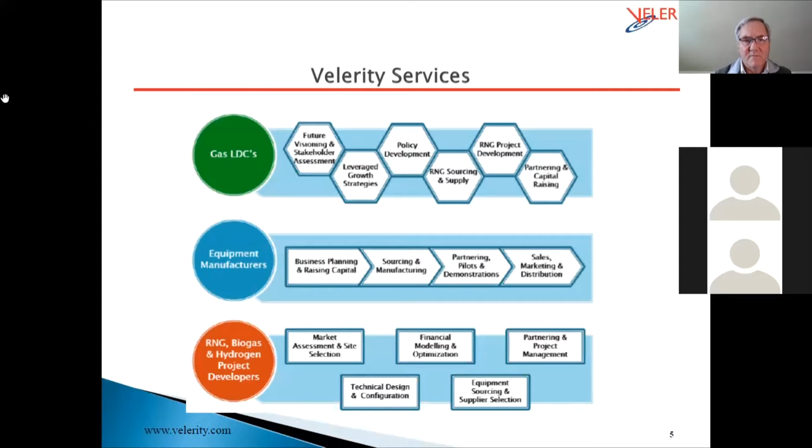Velerity provides management consulting services to companies involved in energy and technology, helping identify market opportunities, establish strategies, and implement action plans. Recent work has focused on the gas industry as well as the renewable gas market. Illustrative clients span the gamut of energy and technology companies.

So today's session, we look at the industry drivers that are causing an interest in converting pipelines to run hydrogen and to consider hydrogen as a renewable gas for heating homes and businesses and providing feedstock to industrial and petrochemical processes.

The electricity generation, the red line on this chart, has gone down significantly since about 2008, and now the attention is turning to other economic sectors in the United States. You can see the green line with transportation is now the leading emitter of carbon, and it has gone up in the last 10 years. You can also see the light purple line, industry, with a significant emissions challenge.

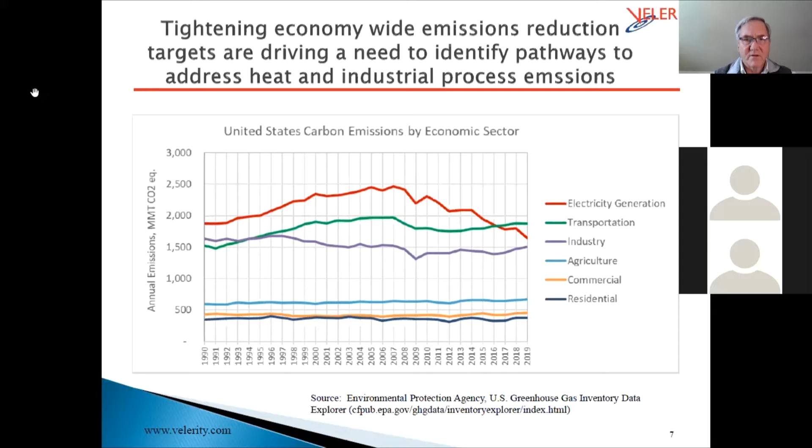So attention is shifting. 24 states have legislated carbon objectives with various dates, most of them including 2050 and intermediate years as well, and those economy-wide targets for carbon reduction are core drivers of the efforts to decarbonize our economy.

The electrify everything strategy is potentially problematic, and there are several ancillary activities associated with that. I recently heard an estimate that curtailed power could reach 25% of all power generation if we go to a full wind and solar economy. Right now it's fairly high; it's about enough electricity in California is curtailed to provide electricity to probably 500,000 homes every year. Significant curtailment, growing every year at about 50 to 60%.

The other challenge is multi-day winter heating loads may overwhelm the electricity system if we convert all fuel-based heating to electricity-based, even with higher efficiency air source and ground source heat pump systems. The storage strategy is problematic if the focus is on lithium ion only, because the cost would be very high to do multi-day storage, much less seasonal storage.

And then there are certain applications which are challenging from an electrification perspective. Older buildings, dense urban areas, and city centers may not lend themselves to the electrification pathway. And finally, we're seeing a fairly significant transition in transportation with heavy transport vehicles, and we can include in this trains, planes, trucks, and ships.

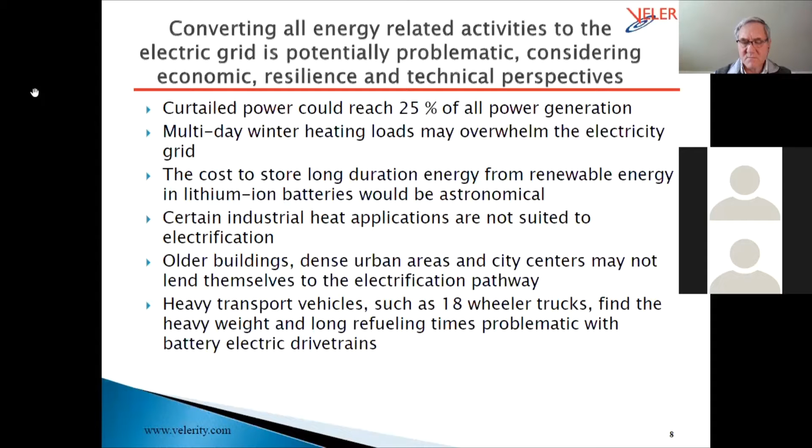To illustrate one of the challenges of an all-electrification strategy, this is a chart of the daily gas and electric use in Great Britain. You can see in the winter load the blue lines going up and down, and the red squiggly line near the bottom is the electricity demand, expressed in terawatt hours, a common unit used in Europe for describing energy flows. If we went to an all-electric system, it would have to increase peak demand by a factor of 4 or 5 times to meet the thermal load required in the middle of winter in Great Britain. This is problematic, especially if everybody comes online at once in terms of heating load.

There are ways to mitigate that, and electricity will cover a large part of that territory, but the economics will require a fuel-based solution in complementary form between the electric and gas side to achieve both system resilience and good economics.

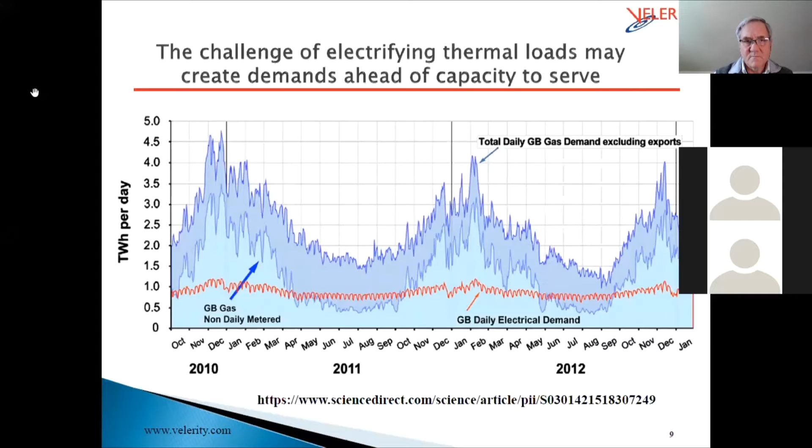The applications for hydrogen in a decarbonized society are quite varied and broad. Long duration storage is a key element, which is what we're seeing with Mitsubishi Power putting in place a relationship with Texas Brine to build salt cavern storage of hydrogen throughout the southeastern and south central United States, a long duration seasonal storage to complement the variable renewable energy that's going to be on the system.

We also see hydrogen playing a role in decarbonizing natural gas, decarbonizing the molecule, so-called. Several steel manufacturing plants are looking at direct reduction of iron with hydrogen for steel manufacturing. And as I mentioned earlier, heavy transport is moving ahead with hydrogen applications from a decarbonization perspective.

The existing hydrogen usage in industry is dominated by ammonia manufacture and petroleum refining, and we're seeing quite a bit of activity generating green hydrogen for manufacturing ammonia and decarbonizing that. People are also exploring using ammonia as a fuel in ships, as well as ammonia as a carrier for hydrogen - converting hydrogen to ammonia, shipping it around the world in large tankers, then either using that ammonia for power generation directly into a gas turbine, or converting it back into hydrogen for use in a refueling strategy.

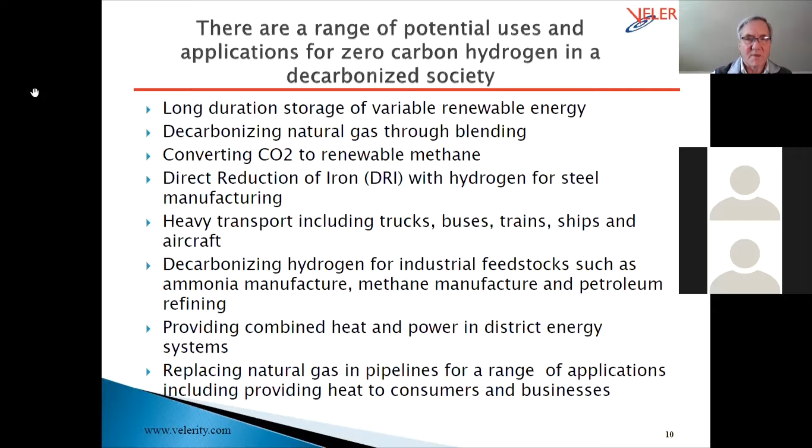And then finally, integrating hydrogen into natural gas pipelines, as well as generating synthetic methane with biogenic sources of carbon dioxide, further reducing greenhouse gas emissions and injecting that resulting synthetic methane into natural gas pipelines.

The United Kingdom has moved ahead in trying to understand the decarbonization of their economy, doing quite a bit of work to understand the implications and requirements associated with this significant decarbonization. They've identified a net zero target by 2050 and a 78% reduction by 2035, halfway between now and 2050.

85% of the homes, roughly 20 million homes in the UK, are heated with natural gas. The real question is that natural gas is responsible for a quarter of the emissions in Great Britain, and so it becomes a key target for emissions reduction. The key question is, how do you do it?

They've already announced that new homes will not be able to have gas and oil furnaces after 2025. Currently, there are 1.7 million oil and gas furnaces installed every year. It's an interesting transition, and the government has an ambition to reach 600,000 heat pump installs for residential heat every year going forward.

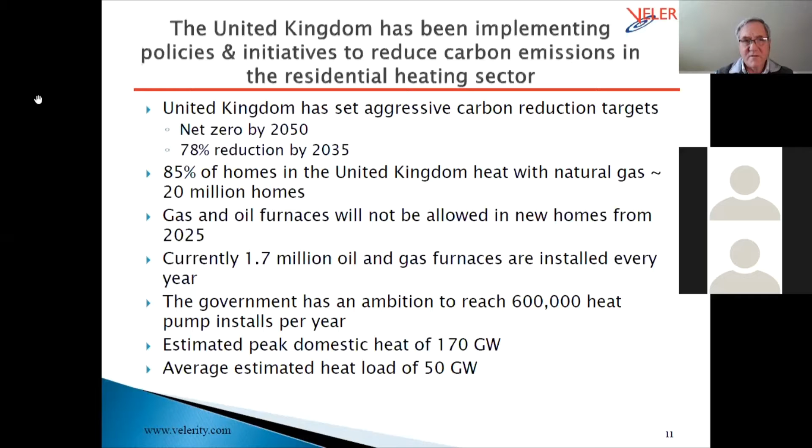You can see the estimated peak domestic heat of 170 gigawatts and the average estimated heat load of 50 gigawatts. So this is the ambition in the United Kingdom, and they haven't answered all the questions yet, but they've been making an effort to understand the situation.

They've conducted a number of studies, paper studies indeed, but they also are integrated with extensive modeling of different pathways to understand what the great energy transformation means for getting to net zero by 2050. I'll quickly review three papers of import in the UK.

One is Clean Growth Transforming Heating. The first set of recommendations is to consider expanding investment in heat networks, district energy systems going forward, making sure the government not only provides incentives but expands the existing set of incentives to expand heat networks in the UK.

They also want to make sure—this is one of the issues in all of these studies—that they deal with the complexity of all of these heat sources and stakeholders.

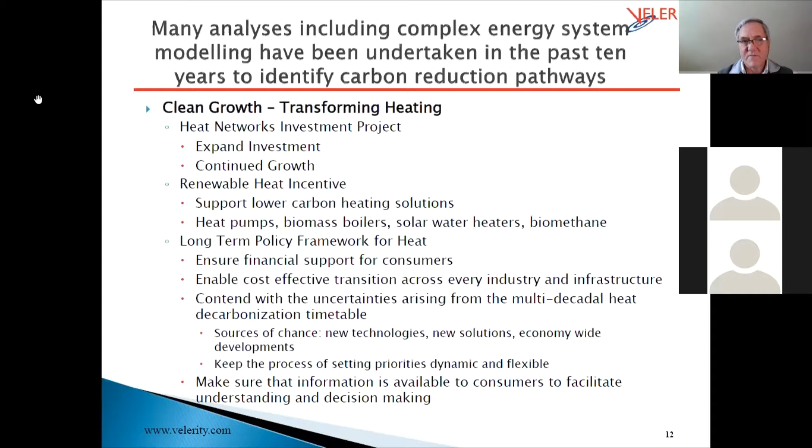The final point is key, of course, which is make sure all the stakeholders have the information they need to make good and effective decisions going forward.

Two other reports: analysis of alternative UK heat decarbonization pathways, and next steps for UK heat policy. These compare the whole system costs of alternative scenarios and understand the implications of those scenarios and pathways on the gas and electric networks. This is a very complex question to answer—the interplay between going all electric or moving towards renewable gas or some mixture of the two.

There even are hybrid boilers out there. In the UK we call them boilers, in the US we call them furnaces. So there are actually boilers going in that are combos, both gas and electric, and they can also be combo hydrogen and electric as well. Being able to build some of that uncertainty into the capability of the end use appliances is clearly part of the strategy of the contractors and equipment suppliers.

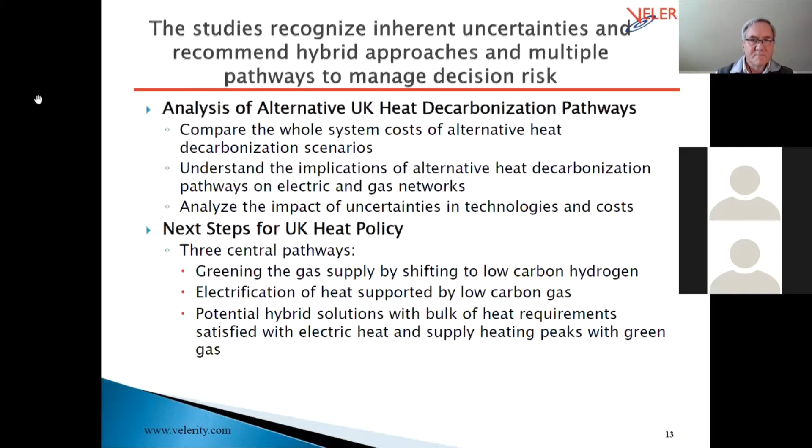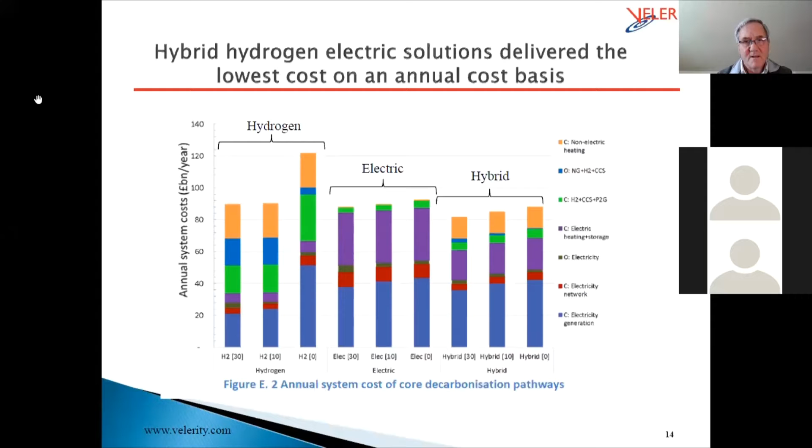I have the results of two studies that have been done, and these are very large studies that have a lot to them, so they can't possibly be represented in a single chart. This shows the running of multiple models with several different hydrogen strategies, several different electric strategies, and then hybrid, meaning both hydrogen and electric studies. At the end of the day, the lowest cost strategy was the hybrid set. This begins to speak to potentially not riding the hydrogen horse entirely or riding the electric horse entirely, but a hybrid, which provides a balance—but you can also shift gears if needed to emphasize certain strategies over others as new capabilities and learnings emerge. It also speaks to a certain amount of uncertainty in these models, or the results that can be interpreted.

If we look at these charts, what they are looking at is the total cost over, say, 20 years of each of these scenarios, normalized to an annualized cost. It's almost like a levelized cost of energy type basis to enable comparability.

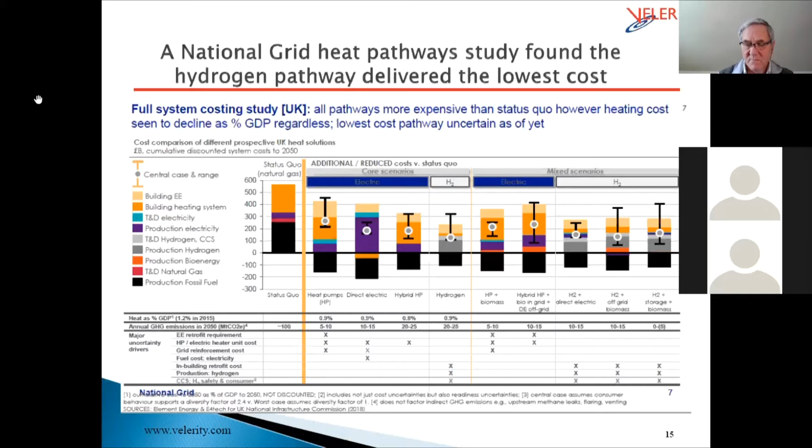It is important for everyone in the hydrogen industry to recognize that if decarbonization is a critical move, we can start fresh by developing green hydrogen and blue hydrogen resources that are low to zero carbon. But it's also important to recognize that we currently produce about 115 million tons a year of hydrogen right now, the bulk of which is gray hydrogen.

We can certainly see some of the petroleum and petrochemical industry players moving to carbon capture and sequestration in order to address the incremental cost of reducing the carbon emissions of existing systems. We can also see that the bulk of hydrogen goes to refining and ammonia, with methanol production as another application, and there's a range of other uses for hydrogen as well.

Most of this is in fence production and use—in other words, a steam methane plant that would be located or co-located with a petrochemical facility.

There are also pipelines—about 1,600 miles of pipeline in the United States today. Those pipelines are designed to transit hydrogen to the various points where its use is demanded, for both ammonia manufacturing and refining. Our most significant pipeline is in the Louisiana, Texas Gulf Coast area, and it has multiple sources of hydrogen onto the pipeline and multiple uses off of that pipeline. It's a very cost-effective way to move hydrogen around.

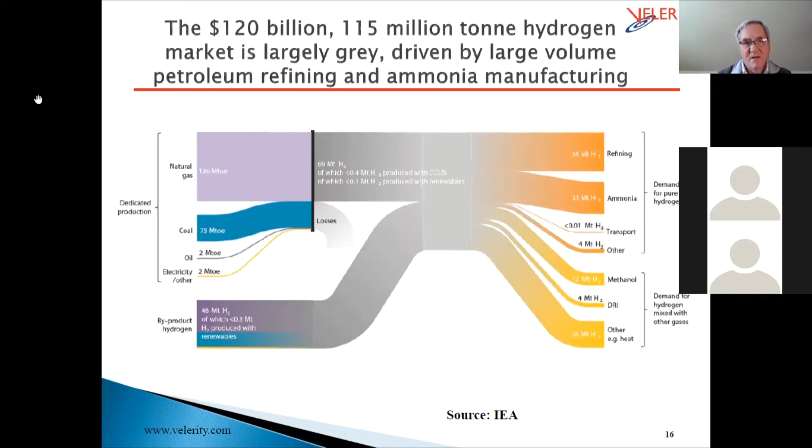Now, this is a chart which is quite detailed, so I welcome you taking a closer look after this presentation. But let me just explain what's on the left and what's on the right, and I can color code it for you.

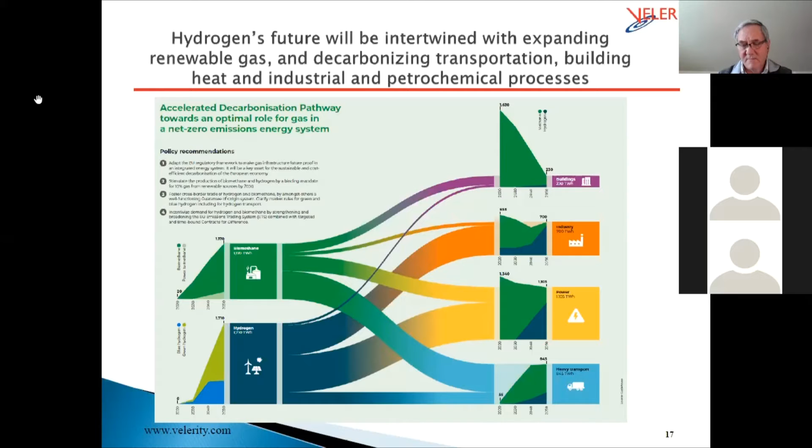The economics of hydrogen are challenging, depending on how much you need, what form it takes, and how you produce it. That's why we can see in the green hydrogen industry there's been a huge effort over a number of years for companies to establish the means by which they will get their hands on green hydrogen and get that hydrogen to the place where it's needed, in the quality and quantity that's required. It's a very challenging problem.

If we look at Nikola and their fueling strategy, which we reviewed two weeks ago, we can see they've been making an effort to establish that strategy for 3 or 4 years, and they only recently arrived at a strategy which includes Arizona Public Service providing 3.7 cents electricity that turns into $1.20 per kilogram hydrogen, and then liquefying that.

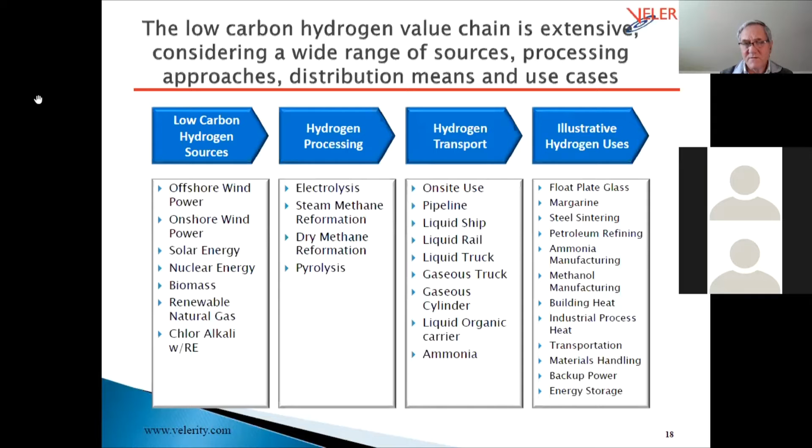In the heating realm, the strategies emerging, mostly in Europe, around decarbonization of building heat certainly, as Amory Lovins would emphasize, require that you make all applications more efficient if you can. So you begin with building efficiency, appliance efficiency, energy management.

And this is part and parcel of the strategies being deployed in the UK, from which this information is based. We can also see that efforts are being made to reduce the carbon intensity of the supply of heat energy.

Biomethane is one, power to methane, hydrogen blending, 100% hydrogen, and then the heat networks. Certainly with a higher proportion of denser city centers in Europe and existing district energy systems, there's great interest in having the heat networks

scavenge any sources of heat in their systems, as well as putting in geothermal heat pumps and air source heat pumps on those networks. But then, of course, integrating the potential for using biomethane and hydrogen in the renewable gas systems in order to provide heat to those heat networks.

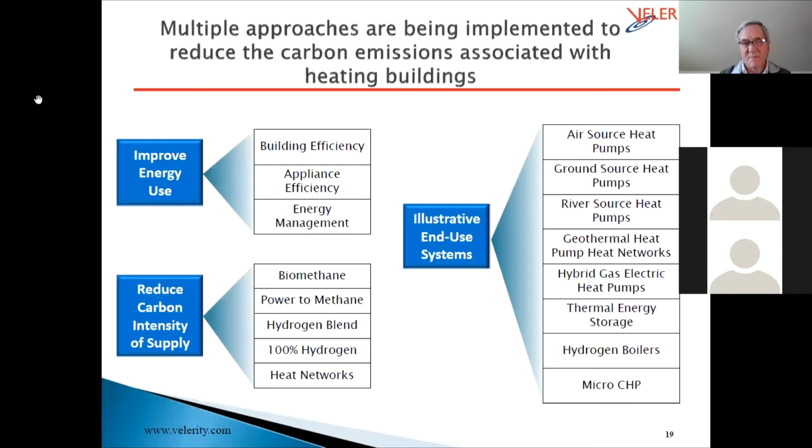So one system I want to speak to is a proposed 25,000-mile hydrogen pipeline network in 21 European countries. This is just an astounding vision. What is key here is they're really talking about repurposing existing natural gas pipelines for about two-thirds of this 25,000-mile network.

And then adding new pipeline extensions into key market areas, industrial zones, etc., for hydrogen, certainly envisioning that hydrogen is going to be fed across the European economy most efficiently through pipelines, as opposed to using liquid trucks or whatever other methods. Gaseous or liquid are the only other two means by which to transport it.

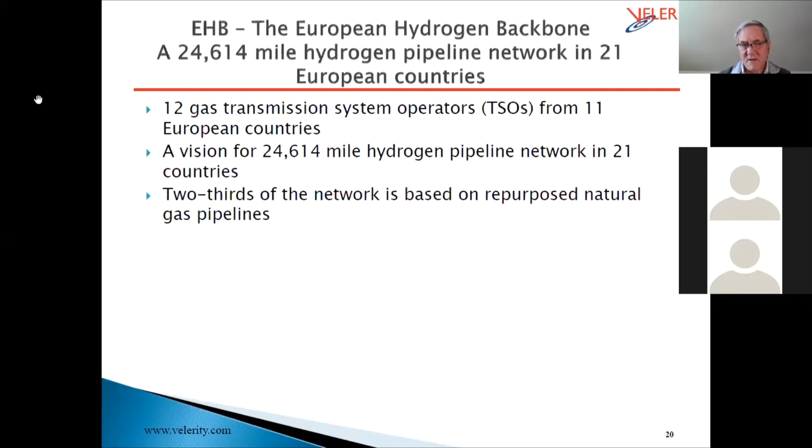And what's also interesting is that this was actually built upon individual company collaborations that identified specific areas for hydrogen pipeline development, mostly in terms of connecting wind-sourced hydrogen into industrial zones, and then looking at industrial zones from a regional perspective, building on those initial plans, as you can see.

One other point I want to make sure we touch on, which is a key part of this strategy: the role of hydrogen in modulating and mitigating the variability of wind and solar is really key, and that's a major driver of these systems. This includes storage of hydrogen to provide month-to-month and seasonal storage in order to mitigate the ups and downs of energy flows associated with variable renewable energy.

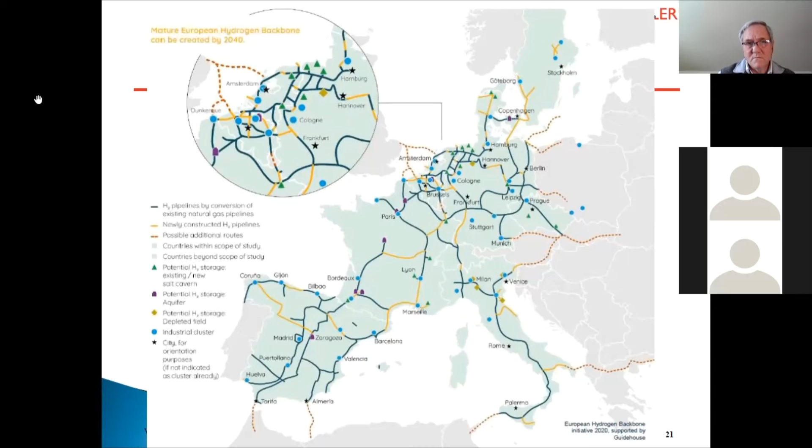The other project I want to mention is notable for its phased approach, representing some fairly good thinking on the part of the partners, Gasunie, TenneT, and Thyssengas. They're envisioning a 100-megawatt power-to-gas facility in an industrial zone in Lower Saxony, located to take advantage of landing sites for electric trunks associated with North Sea wind plants, as well as access to gas infrastructure.

It's envisioned that by 2035, 23 gigawatts of wind will be commissioned in the North Sea area, landing near this location. That 23 gigawatts of wind is going to create an oversupply of electricity, creating the opportunity to convert it to hydrogen cost effectively.

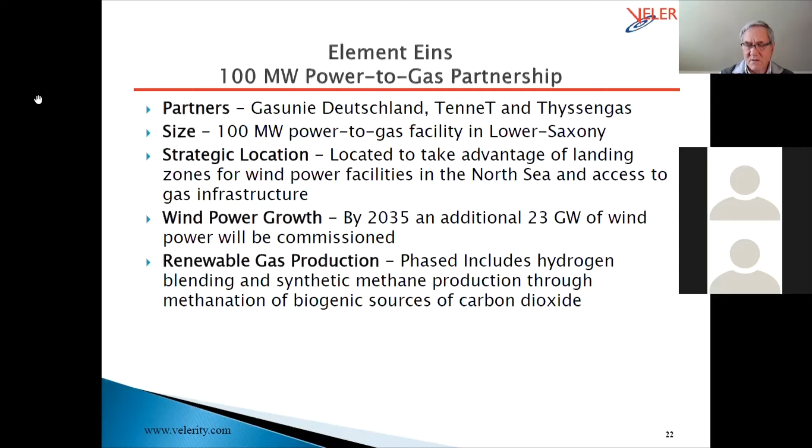They're also envisioning different stages. The phases, as explained here, begin by blending hydrogen into existing natural gas pipelines, up to 20% by volume, meaning 80% by volume natural gas and 20% by volume hydrogen. Just a reminder that hydrogen at 20% of the volume in a pipeline only represents 7% of the energy—it's not that dense at the same pressure from an energy perspective.

And they will also be using that hydrogen for refueling centers for trucks. So that's phase 1 and phase 2.

The next phase is to generate renewable methane and green hydrogen combined with CO2 for methanation—sort of a double whammy here: find biogenic sources of methane from landfills, wastewater treatment plants, agricultural waste, but also upgrade the errant CO2 and create additional methane, injecting that green methane into the natural gas pipelines.

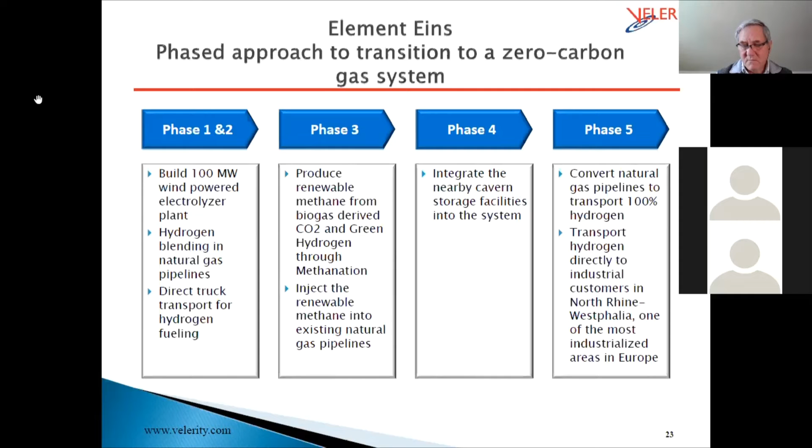I want to pay attention to the clock here, but we have this case study and then another one, and then we'll open for questions and answers.

I did want to point out this project for the Macedonian region, the northwest part of Greece. It's a $10 billion program to convert the existing 4 major coal power plants that provide 20% of the capacity in the Greek electricity system into hydrogen.

It's a multi-pronged approach integrating fuel cells and storage, also integrating with an existing district energy heat system for 120,000 people in Greece that they'd be converting. They also would be exporting hydrogen and building a 120-kilometer pipeline to do that, the Trans-Adriatic pipeline, transmitting hydrogen to Italy. So this begins to look at some of the business case opportunities with hydrogen generation.

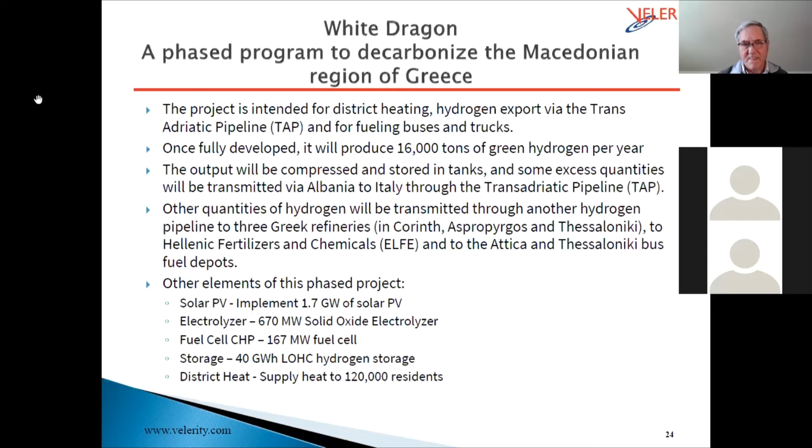The final case study for today is shifting over to the residential side, hydrogen to the home. There are a few test cases and experimentations going on. I wanted to point to this one. The funding has been provided, and they are moving forward with this program. It's kind of brilliant in terms of what they're doing.

First, the strategy is to provide hydrogen heat to 300 homes in Levenmouth on the east coast of Scotland. They'll be providing these homes with free boilers, heaters, and cooking appliances. The participants in this program will pay the same rate for the hydrogen heat as they will for natural gas today.

The approach for the infrastructure is to lay new pipes for the hydrogen alongside 1,000 properties. So they're clearly expecting 1/3 of the people to participate, but it's not a requirement. Consumers will have the choice of staying with natural gas or switching to green hydrogen.

The funding, you can see, is 25 million from Ofgem, a funding resource in the UK. The Scottish government has put in 10 million, and then there's additional funding from the primary host, SGN, as well as 3 other British gas distribution networks. You can see it's wind power to electrolysis. It integrates hydrogen storage, and then zero carbon heating for the homes.

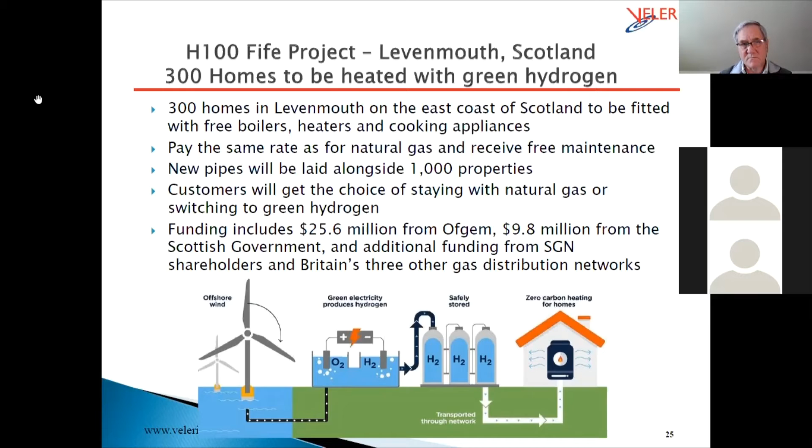The illustration here shows from left to right how the hydrogen flows, and at the very last shows what the impacts are on carbon.

The wind turbine already exists. It's a 7 megawatt turbine offshore, estimated to produce 21,000 megawatt hours per year.

I've just shown an image of an electrolyzer. I'm not trying to pitch or promote any specific company. But if you match the electrolyzer to the wind turbine and run the numbers, it would produce 429,000 kilograms of hydrogen per year based on current system capabilities.

The homes, based on the heat load in the UK, the average heat load per home would require 360 kilograms of hydrogen per year for heating each home.

That's an actual home in Levenmouth with the turbine sort of hidden behind the house, interestingly enough. The hydrogen requirement, therefore, with the 300 homes would be 108,000 kilograms a year.

So what this shows, first of all, is that the turbine they already have provides more hydrogen than the 300 homes will require, by almost a factor of 4. So plenty of hydrogen production.

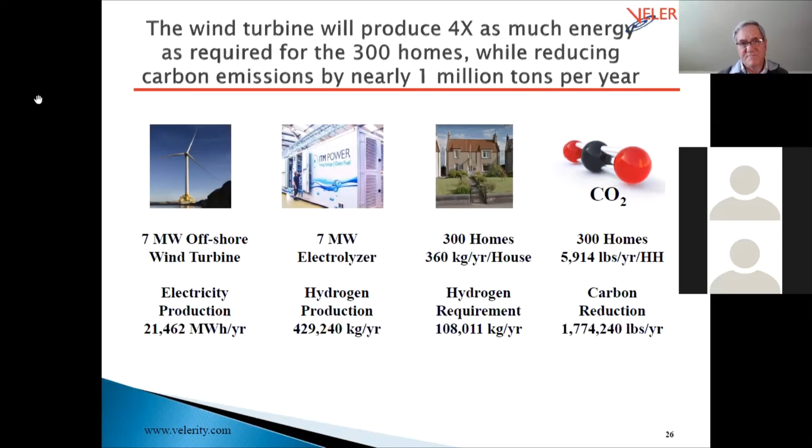The final slide for today is just to show that the industry manufacturers of heating systems are moving ahead with various solutions that run on hydrogen. I wanted to point out there are fundamentally three different technologies at use on this slide.

The first one, the H2ydroGEM, is a flameless catalytic hydrogen boiler with no NOx emissions. It's a fairly innovative solution developed in Italy.

Baxi and Worcester Bosch are involved in several of these test cases with their boilers. They've already developed hydrogen-ready boilers that are able to take a mix of hydrogen and natural gas. The two boilers shown here are still pretty much on the lab bench, but getting ready for, and actually have been installed in test cases, 100% hydrogen boilers that use flame technology similar to existing natural gas boilers.

And that's the same with BDR Thermea Group. They have a hydrogen boiler. But BDR also has talked about a fuel cell solution, and that's what we see with the Viessmann solution, which is a fuel cell combined heat and power.

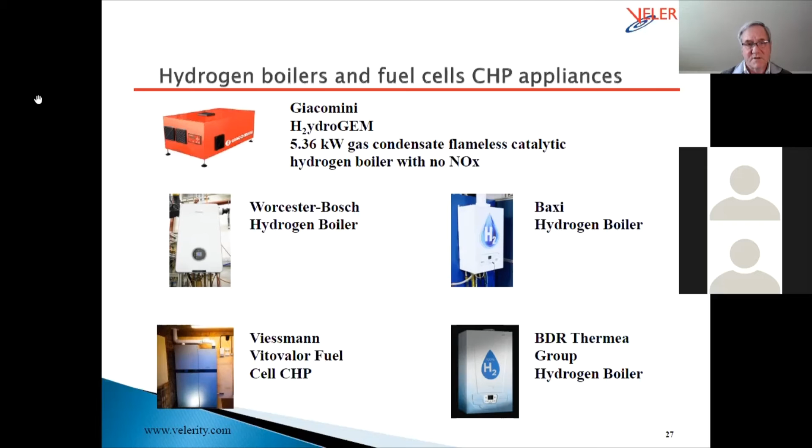There are a number of these on the market today. They would tend to cost more than a standard boiler, but they provide not only heat from the hydrogen, but also electricity generation at the point of use. So there's an interesting tactic that could be deployed here in terms of mitigating electricity demand in the heating season.

So with that, I'd like to open it up to question and answer, and certainly assistance from Rick or Doug would be appreciated here. Any particular questions that people have?

There was one comment, Brad, that I believe you addressed, but since the question came up again, we should address it. Because of the efficiency of heat pumps, the suggestion was made that you wouldn't have the 4 times the electric load that you showed on the chart with the blue peaks and the red electricity load. Yeah, that's an extremely valid point. Heat pumps at their best are 300% efficient, which sounds crazy. How can something be 300% efficient?

But that is the case. I think the issue remains that in the coldest periods, it's usually seen as the 5 cold day strategy, which is, what are we going to do with a 5-day cold snap? How is the system going to respond? What's the efficiency of the heat pump going to be during that period? Certainly in warmer climates, this is important in the United States, if you're in the southern states versus the northern states, the systems may have different implications. The strategy may need to be different, but that is an extremely good point. The modelers would have looked at that implication, looking at what end uses were driving demand in an electric versus gas strategy. But very, very good point. Thank you for that.